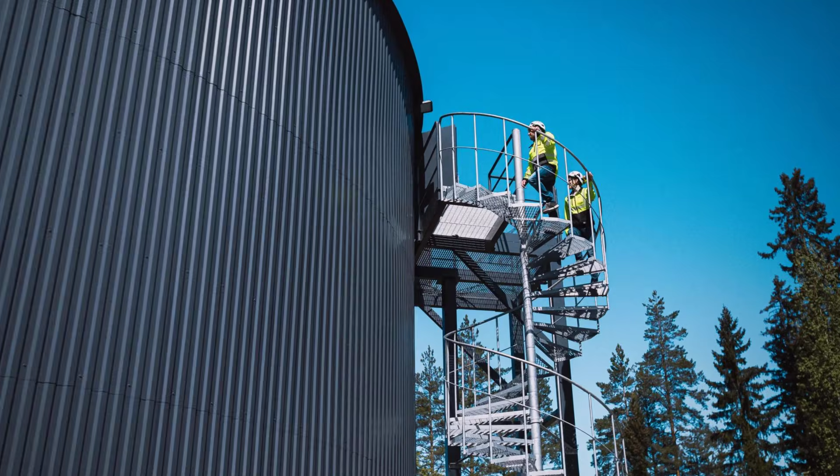The system was 4 centuries old. It still worked. The material that made it possible cost $16 per cubic meter. The lithium battery your energy company wants you to buy instead costs $39,600 per cubic meter for the same function. That is a 2,500 to 1 ratio in raw material cost.

No UL listing exists for any residential version of this technology. No building code in 49 states provides a pathway. No appraisal system will value it. This is not ancient history. This is a story about a technology too cheap to be allowed. The solution was not invented once. It was invented independently by every civilization that ever had to survive a winter.

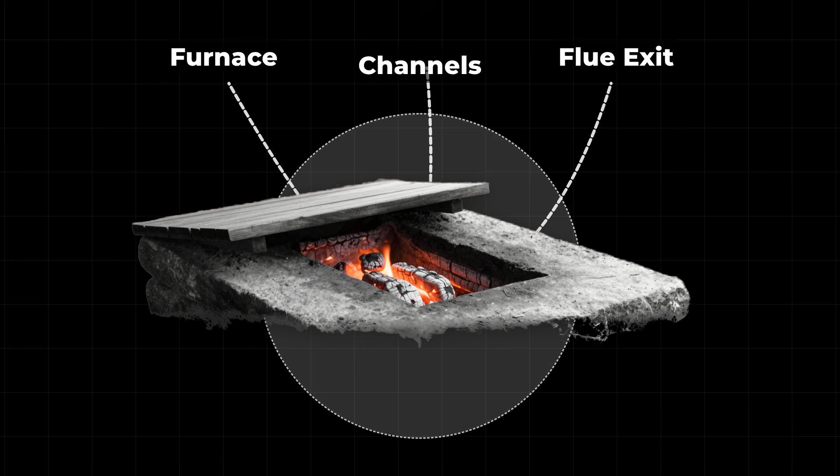Korea, approximately 1000 BCE. The ondol. An external furnace burned fuel outside the living space. Hot gases moved through channels cut beneath thick stone floor slabs. The thermal mass absorbed the heat and released it slowly over 12 to 24 hours. The fire could die. The floor stayed warm. By the 15th century, it was standard construction across the entire peninsula. Not a luxury. How you survived a Korean winter.

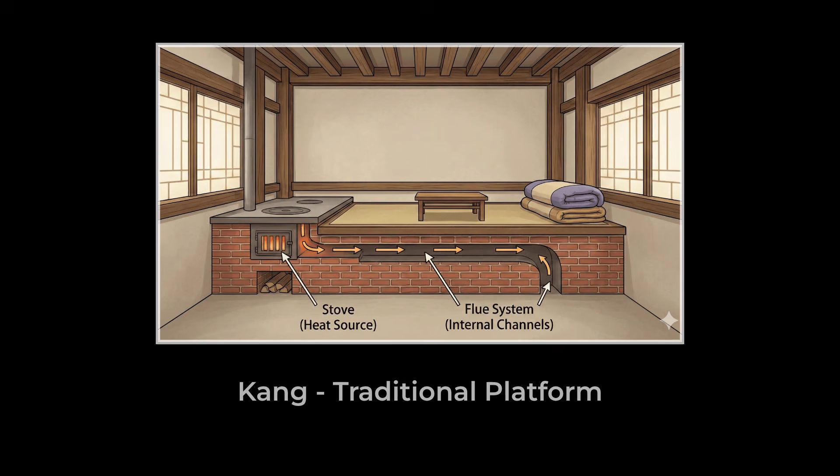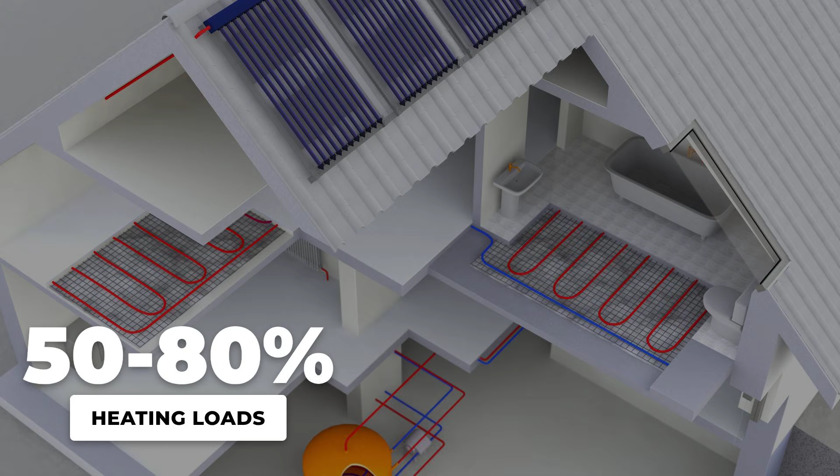Today, over 90% of South Korean homes still use a direct descendant of that system. China. The Kang. A heated sleeping platform connected to a cooking stove by a flue system. As recently as 2004, 67 million Kangs served 175 million people across 14 northern provinces. Not history. Present tense. Heating loads reduced by 50 to 80%. Rome engineered the same principle into the hypocaust. Raised floors, hot air channels, stone mass doing the work.

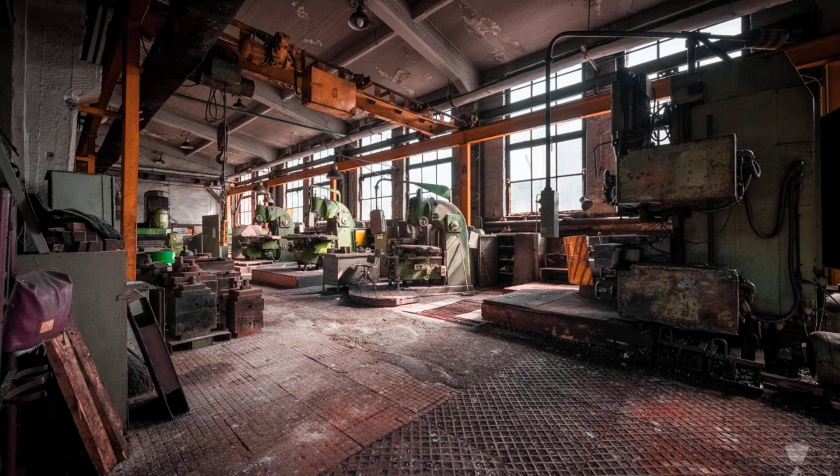Finland never forgot it. Tulikivi Corporation, founded 1980 after the oil crisis. Soapstone masonry heaters, 5 to 7 tons, one 30-minute burn, 24 hours of heat. No electricity, no moving parts. 300,000 homes worldwide. Every civilization with access to stone arrived at the same answer independently. The reason is because the physics is not complicated. It is just not profitable.

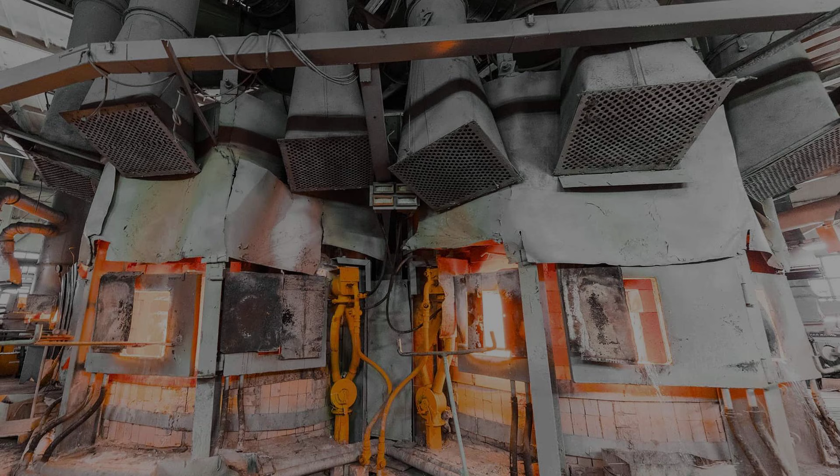Thermal mass absorbs heat, holds it, releases it slowly. The denser the material, the longer the cycle. Sand is dense, abundant, and chemically inert. It does not react, it does not degrade, it just stores. The National Renewable Energy Laboratory tested it. They heated silica sand to 1,200 degrees Celsius and held it there for 500 hours. Then they measured every property they could think of. No significant changes in any measured parameter. No degradation, no chemical change, no wear. The technology does not age because there is nothing in it that can age.

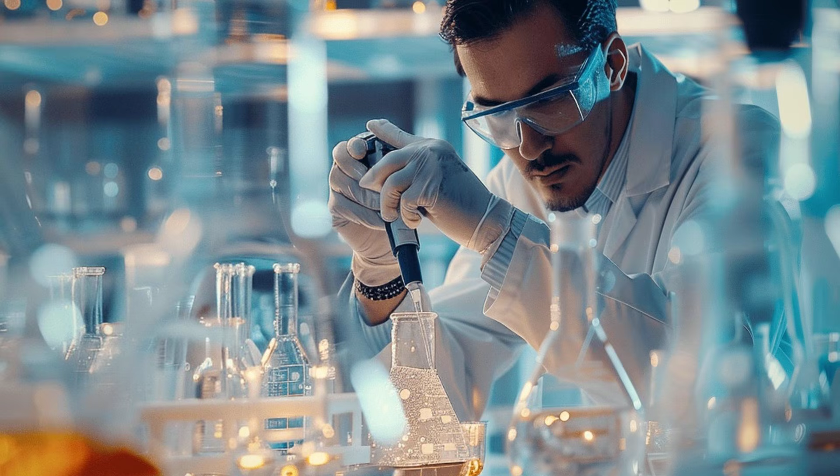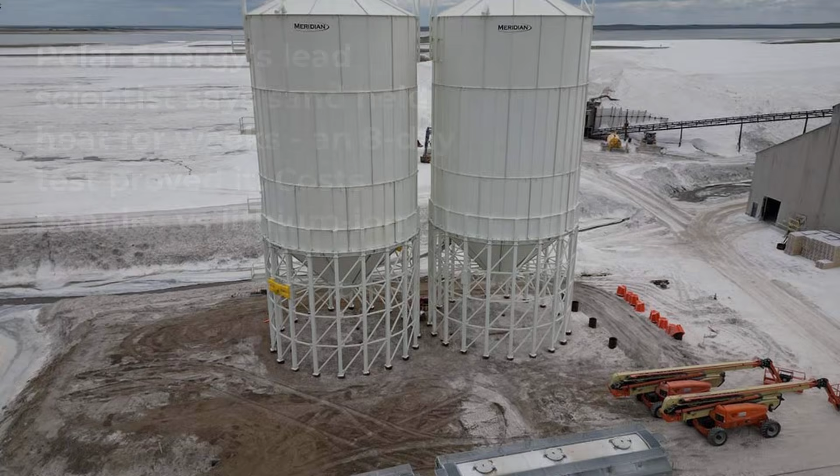Here is the counterintuitive finding. Polar Night Energy's lead scientist demonstrated that heat applied to one side of a 1-meter block of sand at 500 degrees Celsius takes over 8 days to reach the far side. 8 days. 1 meter. The sand insulates itself. The same property that makes heat difficult to extract quickly is what allows sand to hold it for weeks without significant loss. Now the number that should stop you.

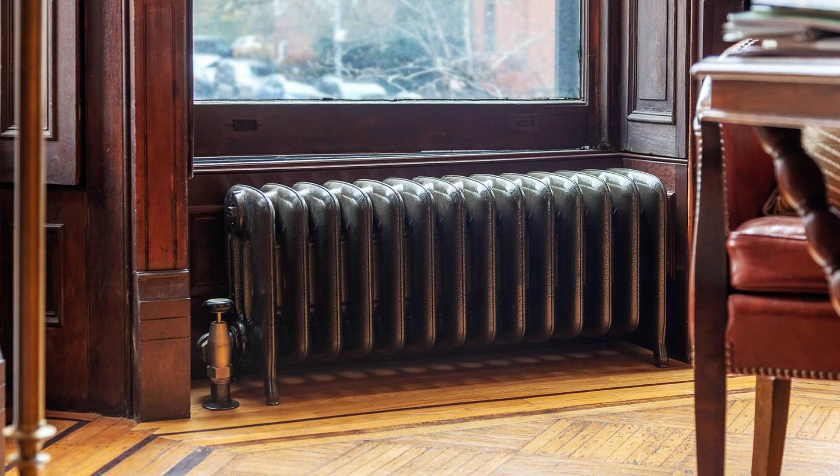Sand stores energy at $4 to $10 per kilowatt hour. A lithium-ion battery stores it at $300. Not a small difference. 30 times more expensive. A 2,500 to 1 ratio in raw material cost. Same function. You do not need a factory. You do not need a contractor. You do not need a permit.

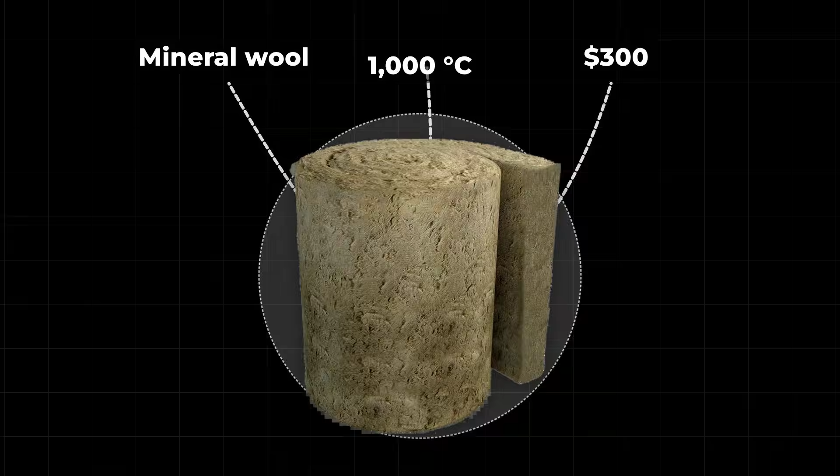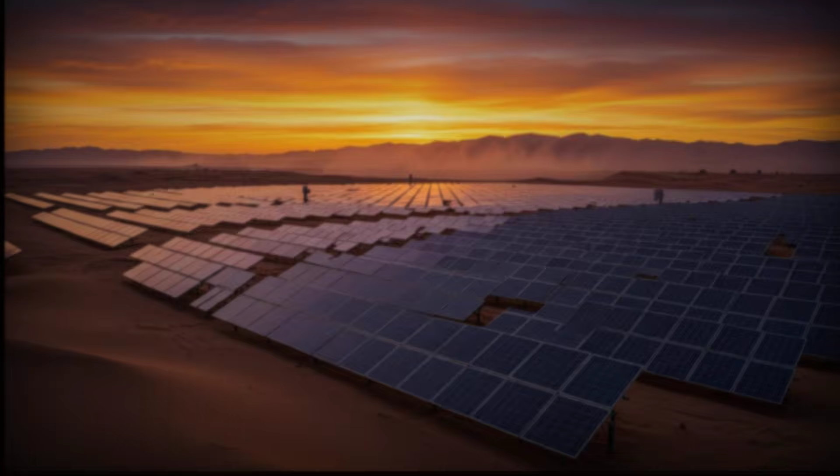A 55-gallon steel drum. Mineral wool insulation rated to 1,000 degrees Celsius. A heating element from a hardware store. A high-limit thermostat. Total materials under $300. One builder on a homesteader forum wired 4 260-watt solar panels directly to heating coils embedded in sand. No inverter, no battery, no grid connection, no monthly bill. Just photons hitting silicon, electrons flowing through wire, and heat entering sand.

His test vessel hit over 1,000 degrees Fahrenheit. A forum member scaled the same principle to a 55-gallon drum. Yesterday, my sand battery hit over 600 degrees. This morning, the lowest temperature was 234, under $300, held overnight.

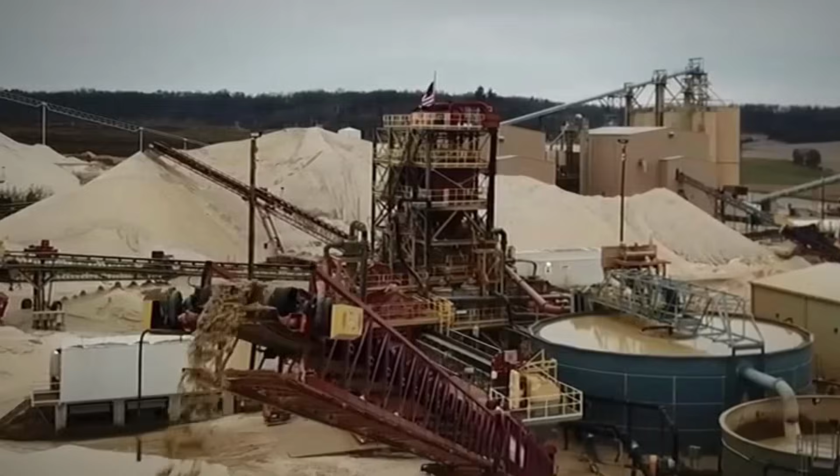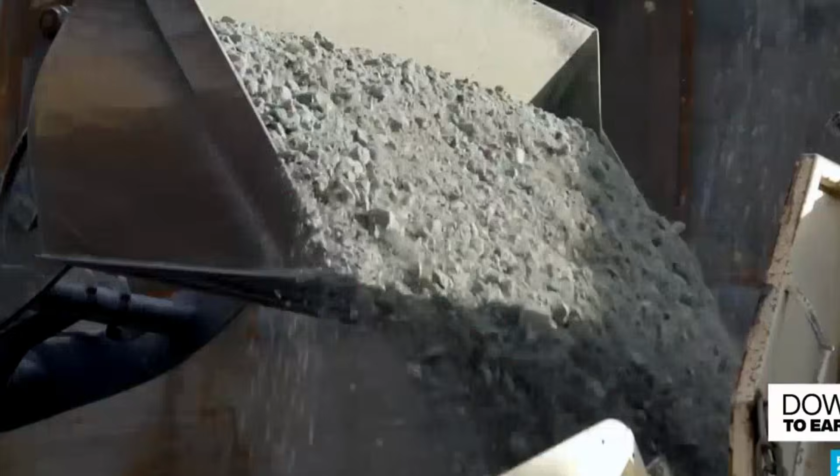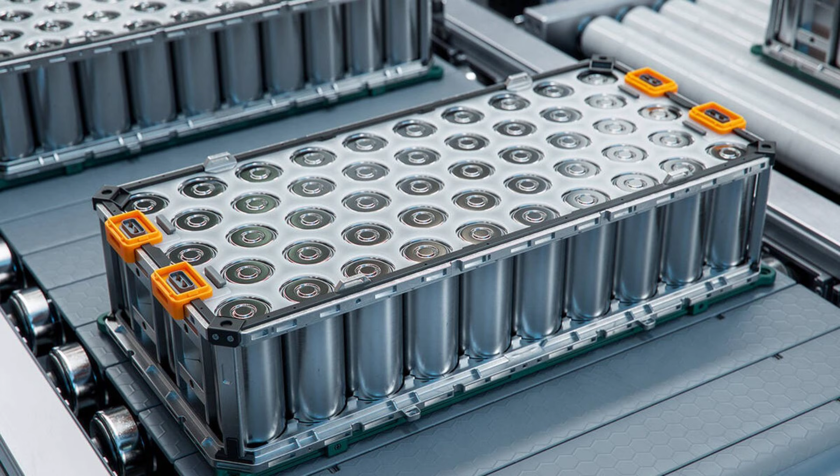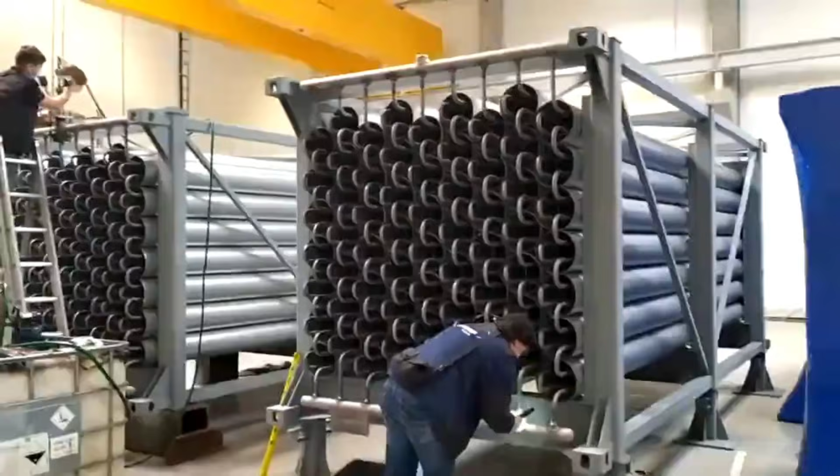One honest number. Round-trip electricity to electricity efficiency runs 50% to 52%. But a home does not need electricity back. It needs heat. In thermal terms, the round-trip efficiency runs 75% to 90%. The physics works. The cost works. Material is already in every hardware store on your street. So why has no American ever installed one legally?

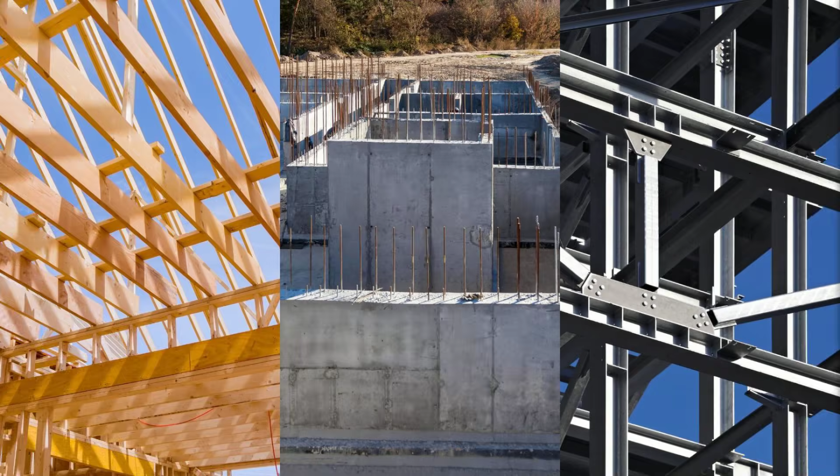The answer is not a conspiracy. It is a system. The International Residential Code governs what you can legally build in 49 states. It prescribes specific materials and methods: concrete, dimensional lumber, masonry, light gauge steel. Everything outside that list must pass through a variance process. A registered professional engineer analyzes your system, costing $2,000 to $10,000.

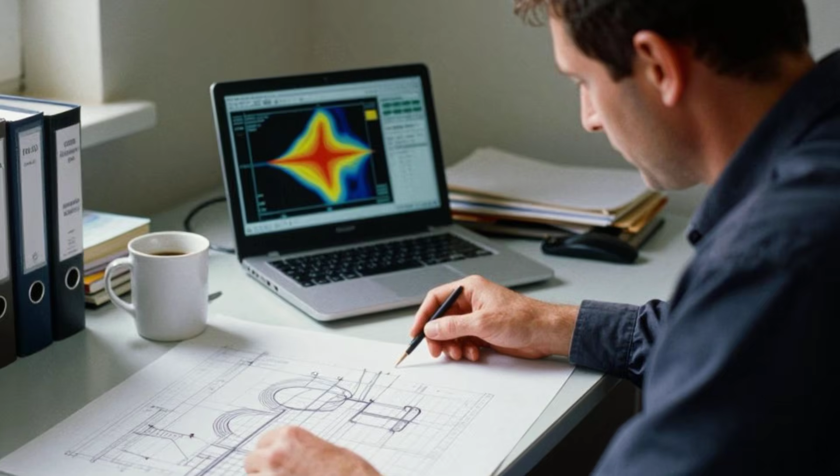Then third-party testing by UL or an equivalent body, costing $10,000 to $50,000 or more. Then approval from a building official who has likely never seen the technology you are proposing. No UL listing exists for any residential sand battery. No UL listing exists for any solid thermal storage heating device.

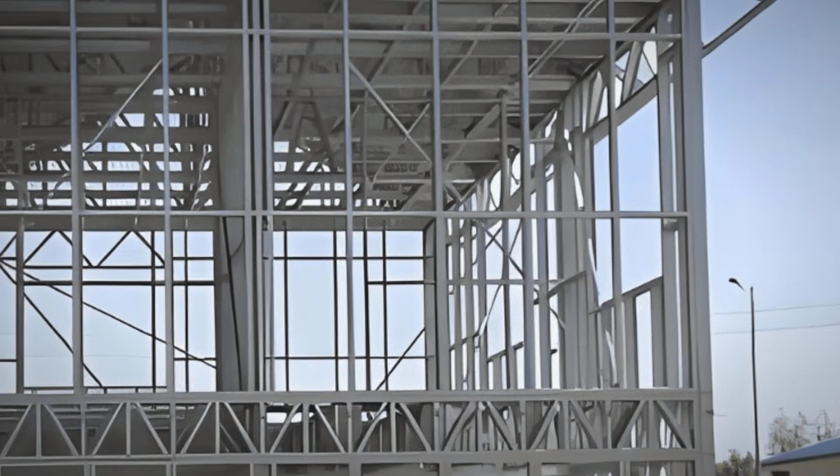No category. No pathway. The organization that writes American heating standards published a design guide in 2019 that explicitly excludes hot storage and passive thermal systems. The gap is not accidental. It is structural. Then the appraisal system. Fannie Mae and FHA require a functioning heating system for mortgage approval.

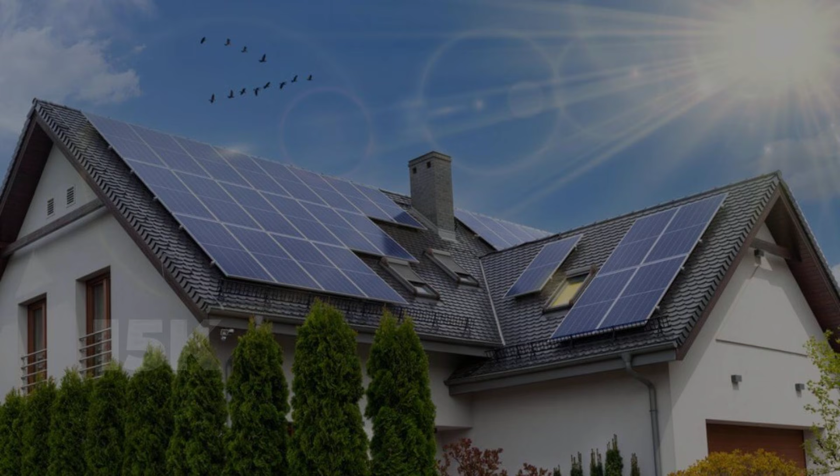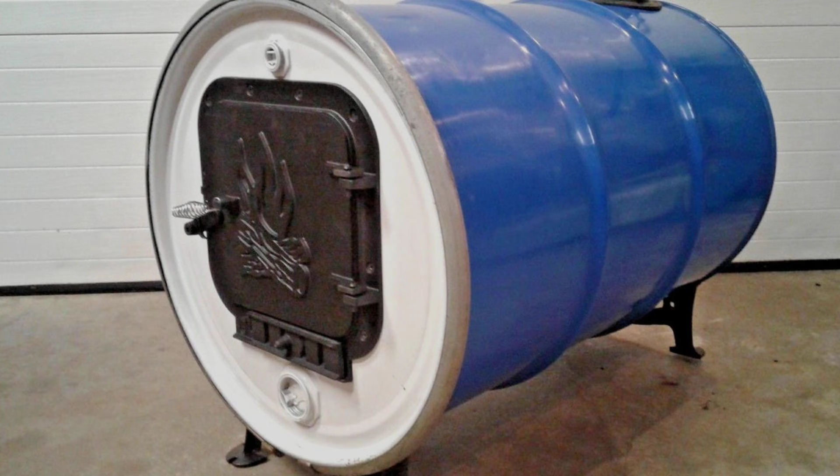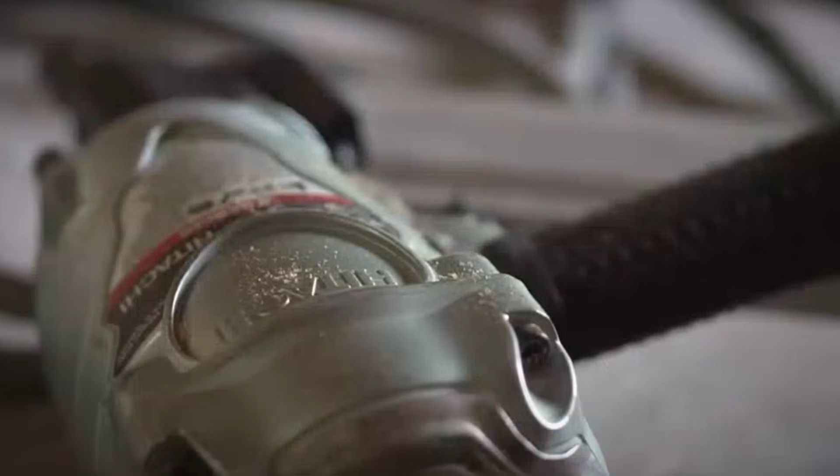One documented case. A homeowner installed a $15,000 solar and storage system. The appraiser valued it at $0. Then, insurance. No UL sticker on the drum. A fire claim can void your entire policy. No villain required. A system designed to certify manufactured products automatically excludes anything built from commodity materials on a job site. Behind the system, there is an organization.

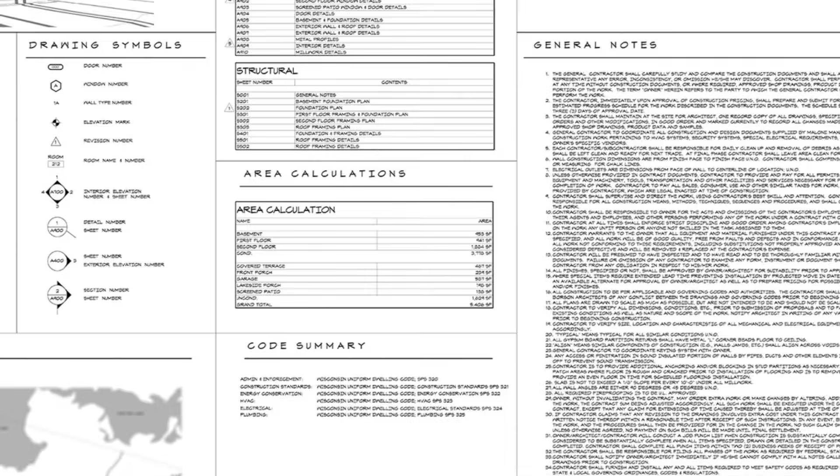The American Gas Association represents gas utilities across the United States. It maintains a Building Energy Codes and Standards Committee. It recruits members to bolster voting power at the International Code Council, the body that writes the IRC adopted by 49 states. It coordinates testimony. It proposes code language. It organizes opposition to electrification provisions.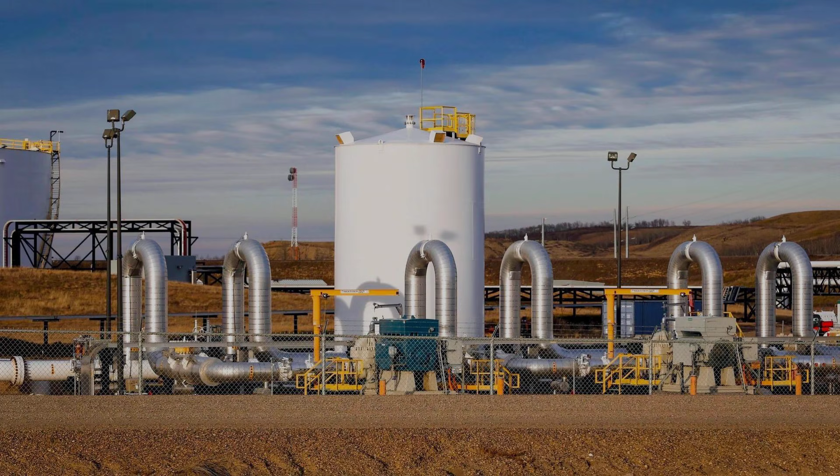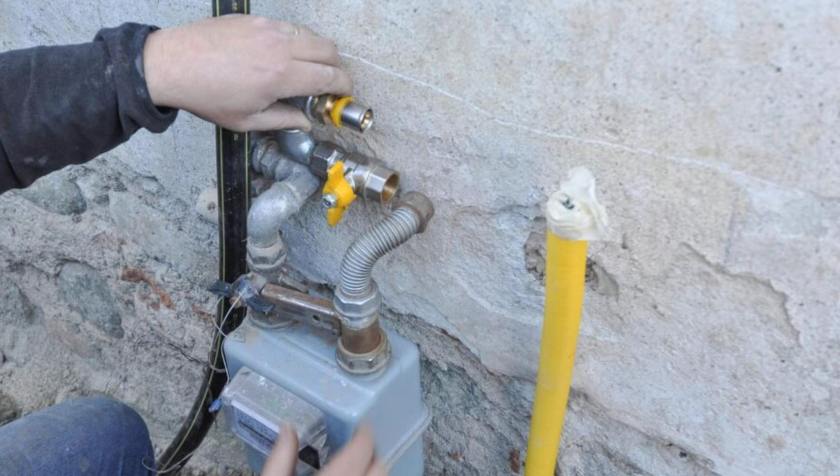In 2018, a GTI employee wrote in an internal communication, "Massive force switching to electric technologies under decarbonization policies is an existential threat to natural gas direct use in buildings." Existential threat. Their words, not mine. As of 2024, the AGA had helped pass preemption laws in 25 states preventing cities from banning natural gas in new construction. They reversed Berkeley, California's first-in-nation gas ban through federal court.

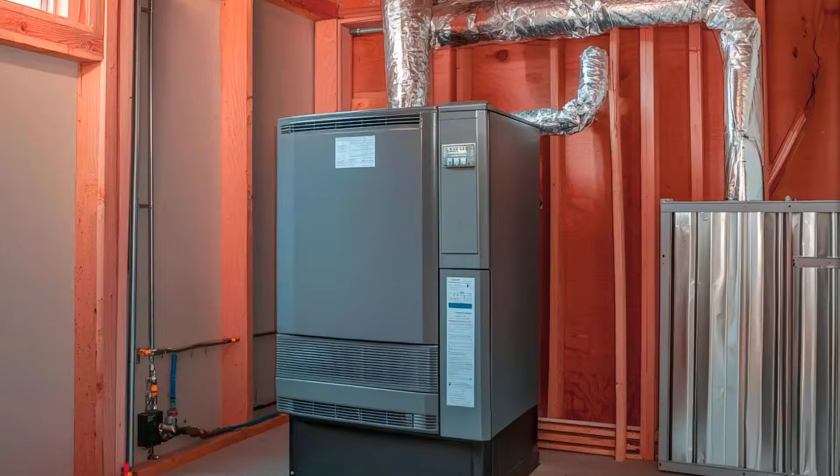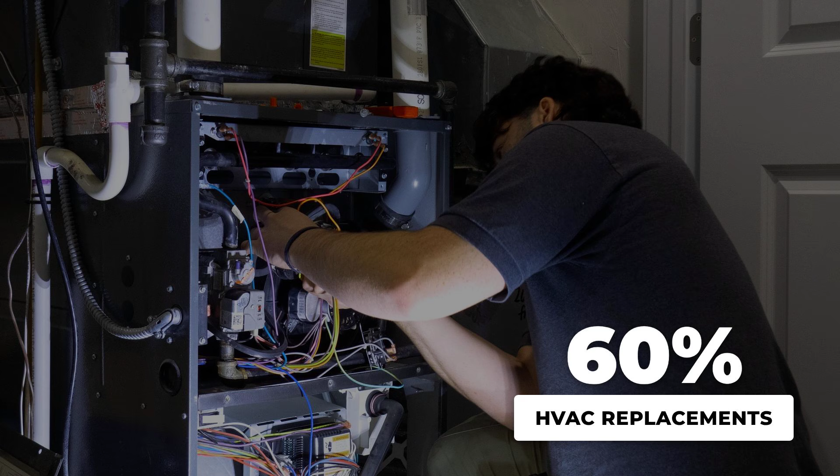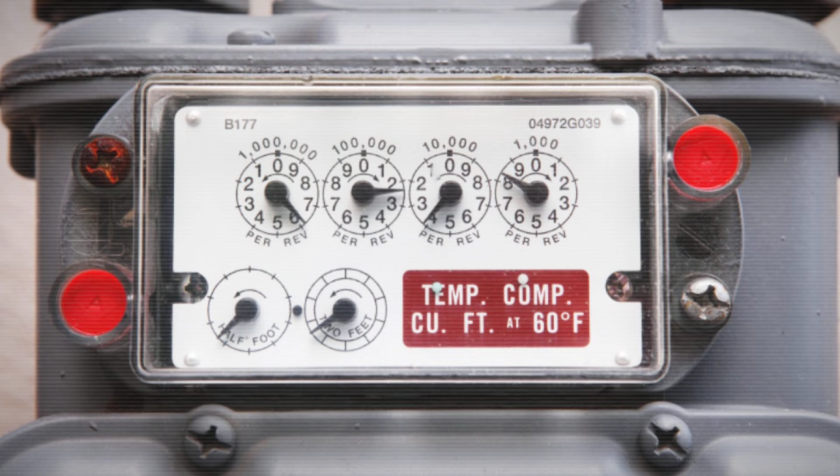The residential heating equipment market exceeds $12 billion annually. The top 8 HVAC vendors control approximately 90% of revenue. The business model is proprietary equipment, licensed installation, periodic service, eventual replacement. Emergency replacements alone account for 60% of residential HVAC sales. A heating system with no moving parts, using commodity sand that never breaks, never needs service, and cannot be metered is not compatible with this model.

They update the building code every 3 years with committees that include HVAC contractors and equipment manufacturers. They have built an appraisal structure that values a gas furnace at market rate and a sand battery at zero. A heating system you cannot meter is a threat to every business built on metering. Same physics, same sand, different government.

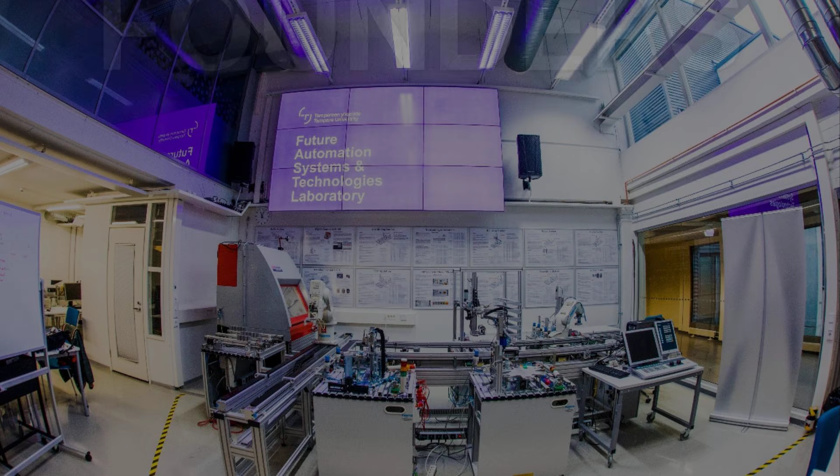Business Finland funded both the Kankaanpää and Pornainen installations. Finland's Minister of Economic Affairs attended the Kankaanpää inauguration in person. The project was named Finland's Productive Idea of 2023. It appeared on NASDAQ Helsinki billboards. It appeared in Times Square. Founders were 2 engineers at Tampere University who started their first prototype in a grandparents' backyard cottage.

By April 2024, they had raised 7.6 million euros in seed funding. Time named their sand battery one of the best inventions of 2022. 0 installations in the United States. The question the contrast forces is simple. It is not whether the technology works. It is whether anyone with the power to allow it will.

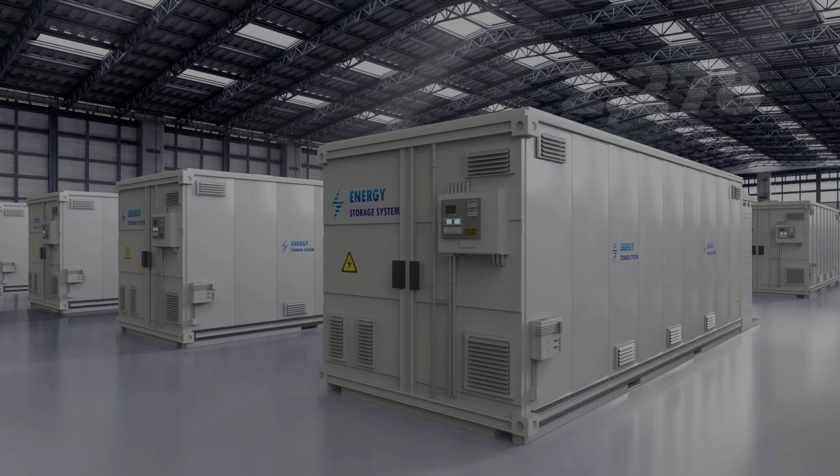$16 per cubic meter. $39,600 per cubic meter. Same function. 2,500 to 1. The sand is already here, under every driveway, in every bag, at every hardware store on your street. It heated Korea for 3,000 years. It heated a medieval banqueting hall in 20 minutes. It is heating 100 Finnish homes right now.

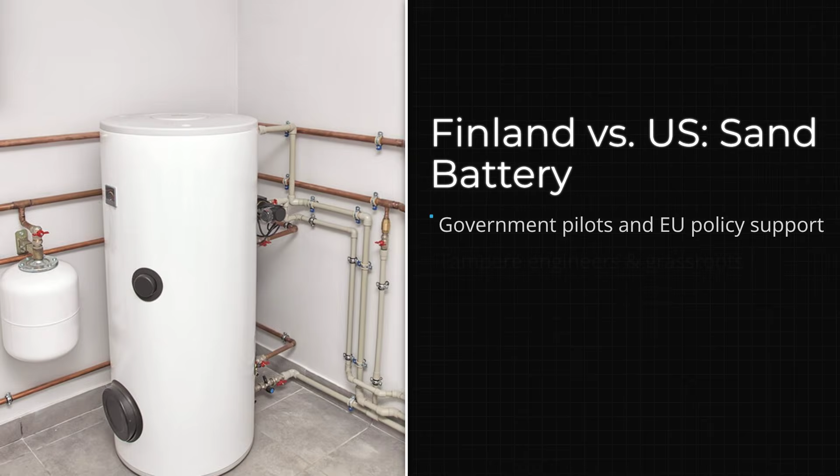The building code has no category for it. The appraisal system cannot see it. The insurance forms do not acknowledge it. It does not break. It cannot be patented. It asks for no subscription, no service contract, no recurring bill.

There is a wall that generates heat from sunlight alone. Invented in 1967. Still not in the building code. That story is next.